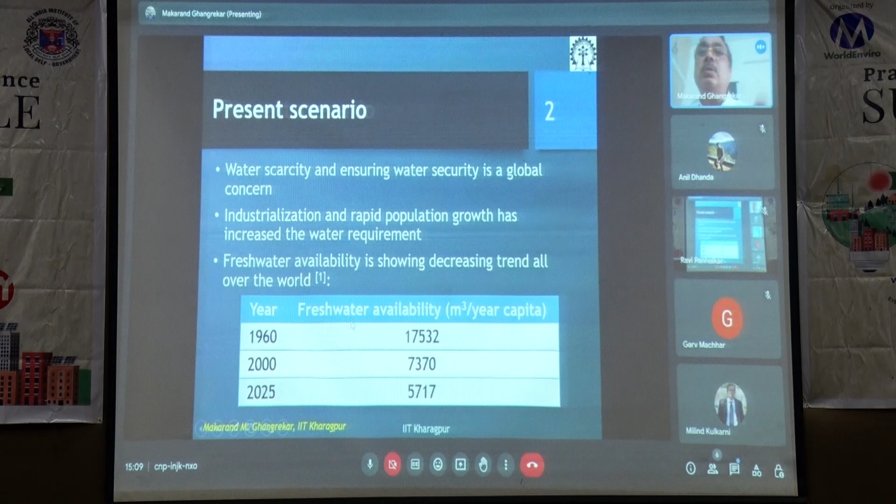In 2025, it is expected to remain around 5,700 meter cube per capita. To fulfill this gap and reduce the stress on fresh water, we need to find alternate sources. Sewage, that is municipal wastewater, can become an assured source irrespective of the season. This quantity of water is generated in every urban area, and if we provide proper treatment, we can produce reusable quality treated water.

In a conventional sewage treatment plant, mostly it comprises primary and secondary treatment, and tertiary treatment is absent. But tertiary treatment is really required to produce reusable quality treated water out of municipal wastewater.

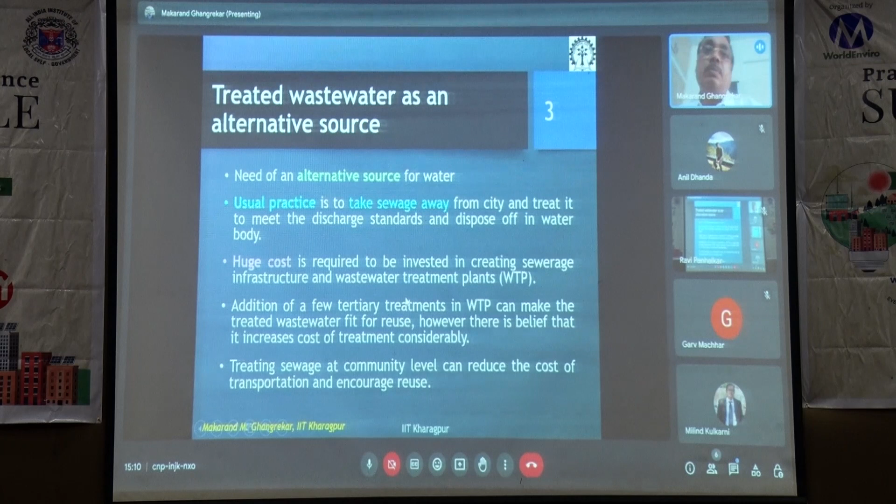The Indian scenario is something like this: about 38% of the sewage generated in this country is being properly treated before disposal, and the remaining is being discharged untreated into water bodies. Though the government is very aggressive in erecting sewerage infrastructure, because of the rapid rate of urbanization, we are still lacking in this infrastructure.

To make treated water out of municipal wastewater available for public use in various non-potable applications, we also need to find technologies which are affordable and can give reliable performance as well as being cost effective.

The concern here is the emergence of emerging contaminants - personal care products, antibiotics, painkillers, and other solvents that we use in day-to-day life. They appear in trace concentrations in sewage and are difficult to remove with primary and secondary treatment. These compounds remain almost untouched, hence proper tertiary treatment is required to produce safe water for downstream reuse.

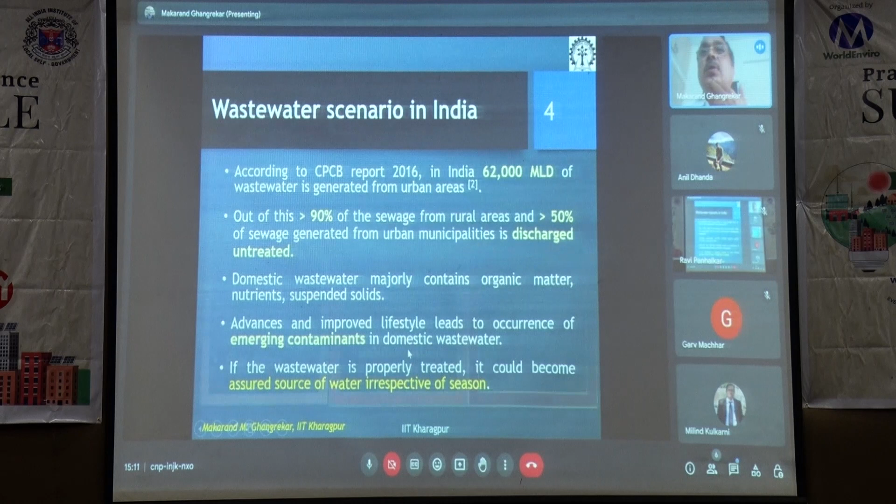We are all aware of primary and secondary treatment, and the need for tertiary treatment. Primary treatment is meant for removal of suspended solids as well as floating matter. Secondary treatment further removes colloidal and soluble organic matter, using either aerobic or anaerobic processes. In this biological treatment process, the sludge generated gets stabilized.

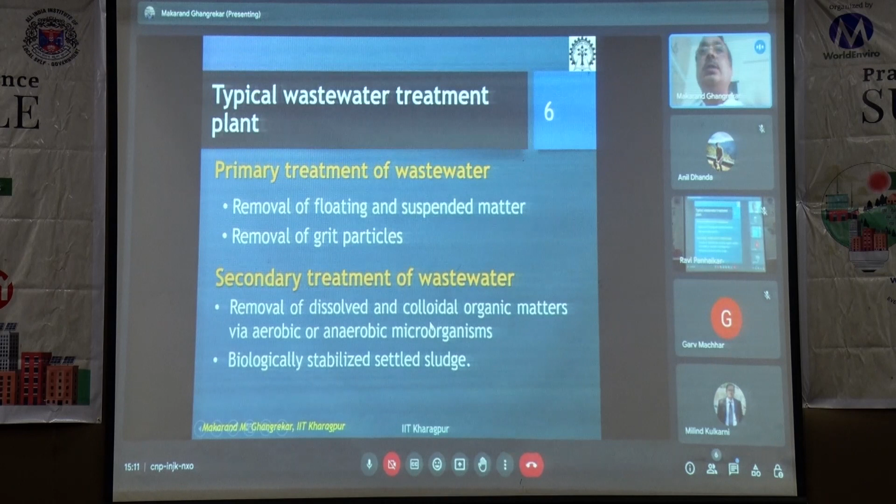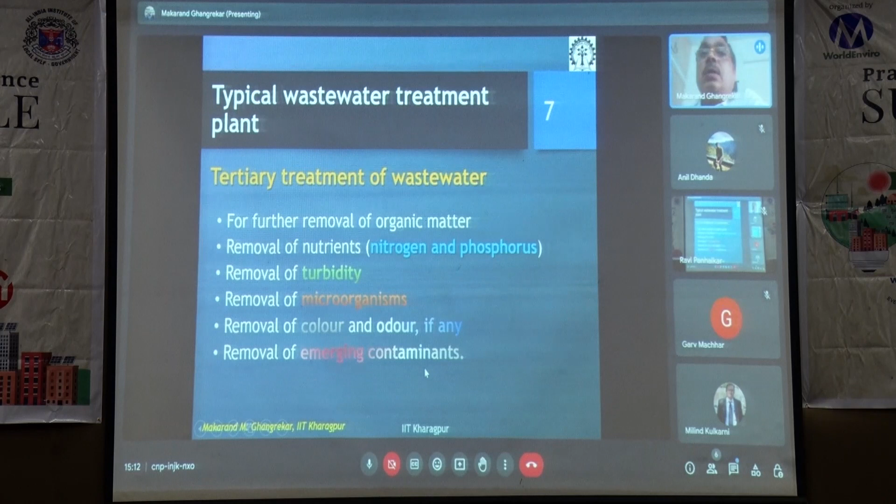However, secondary treated effluent will not have the quality suitable for downstream reuse, hence further treatment may be required for removal of organic matter, nutrients, turbidity, and pathogenic microorganisms typically present in it. Color and odor are mostly due to presence of organic matter, and will get removed once we remove organic matter. We also need to think about removal of emerging contaminants, which is a major challenge, and interested scientists are developing different technologies like advanced oxidation processes for removal of these contaminants.

The National Green Tribunal has given a very ambitious target in 2019: for mega and metro cities, BOD should be restricted to 10, COD to 50, total nitrogen to 10, and total phosphorus to 1. We have adopted these standards by now, and very soon we need to equip our existing wastewater treatment infrastructure to meet these guidelines.

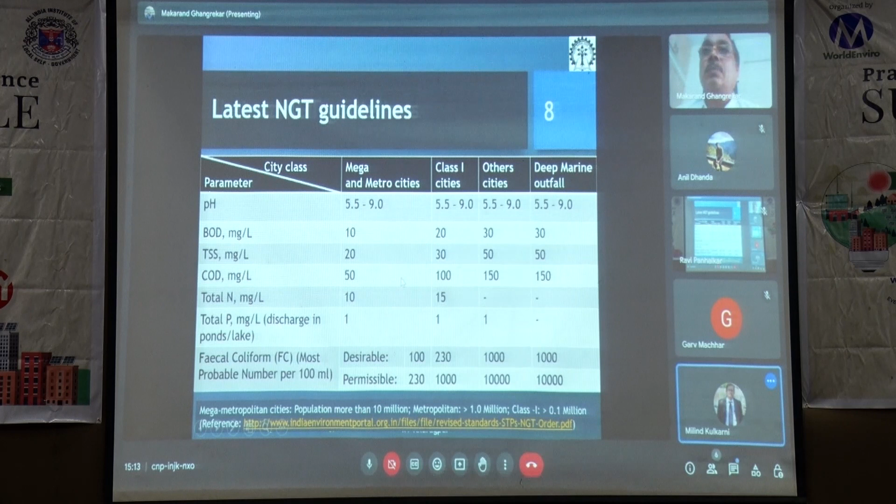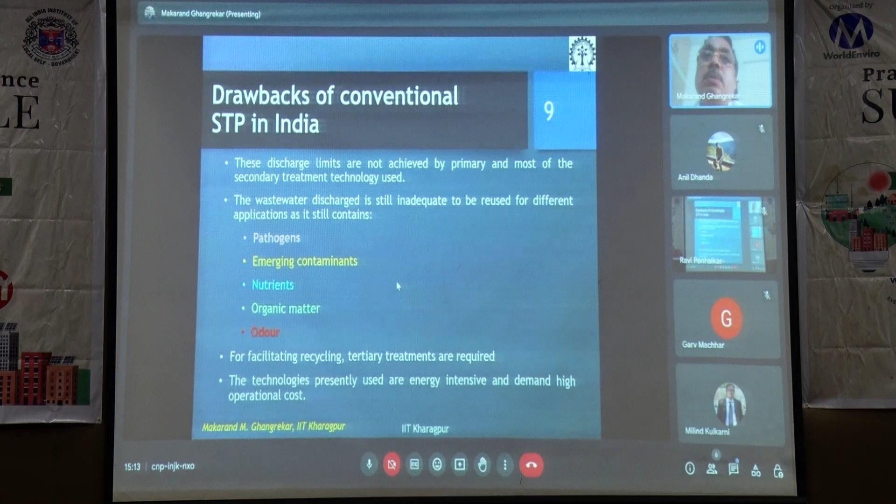The drawbacks of conventional sewage treatment plants include inability to remove organic matter to the least extent, to produce effluent free from organic matter, and we require further treatment for pathogen removal, removal of emerging contaminants, nutrients, etc.

We all know that reverse osmosis, employed in developed nations for treatment of secondary effluent, is capable of producing water free from almost all these pollutants. However, at very high cost. My experience is the cost of employing RO would be of the order of rupees 30 to 50 per kiloliter of water processed, and also in the process, reject is generated. So reject management is also an issue with RO.

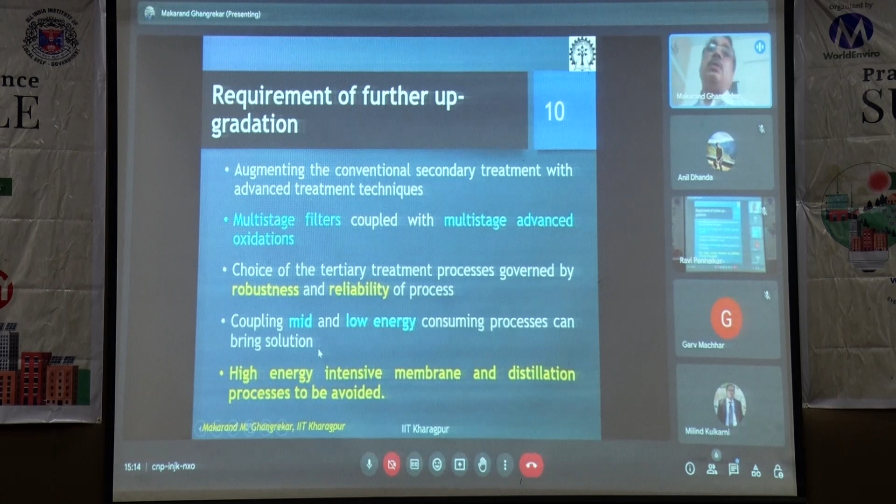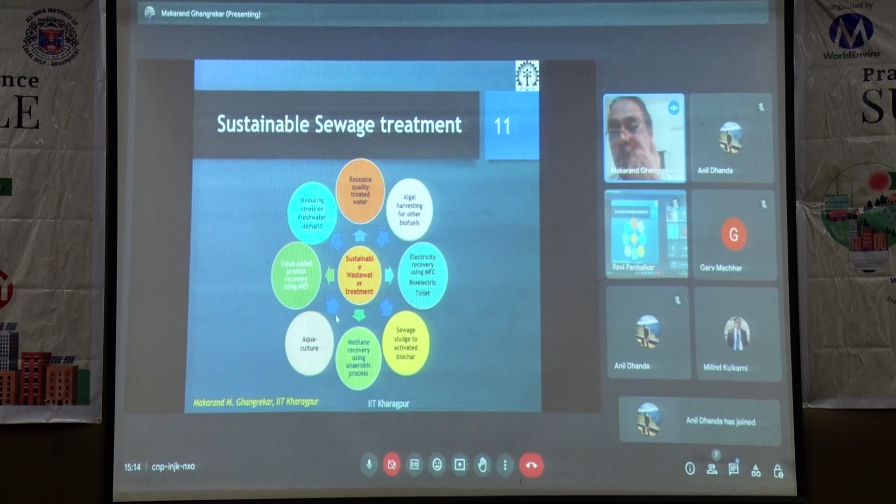Instead, we need to look forward to mid or low energy consuming technologies, at the same time reliable technologies which will produce treated wastewater at an affordable cost. If we invest in tertiary treatment processes which are affordable, that will produce reusable quality treated water at affordable cost. It will reduce the stress on fresh water demand.

To achieve that, we can explore algal technologies so that the harvested algae can be used as a feedstock for biofuels. We can use the concept in bio-electrochemical systems, the specific configuration microbial fuel cell, where the wastewater itself can work as a fuel, and in one step electricity can be recovered.

We can explore the possibility of sewage sludge conversion into activated biochar or hydrochar. This char itself can be used for tertiary treatment or for industrial treatment and many other industrial applications.

Methane recovery from wastewater is almost a mature technology now, and most industries and even municipalities have anaerobic reactors for recovery of methane as a first stage treatment. Aquaculture can also be practiced in partially treated or treated sewage so that it will fetch us additional revenue from the sale of fish.

An upcoming technology: since the last 10 years, scientists are focusing on microbial electrosynthesis, where apart from wastewater treatment, the CO2 released in oxidation of organic matter can be utilized for synthesis of carbon chemicals. By exploring these possibilities, we can impart sustainability to wastewater treatment.

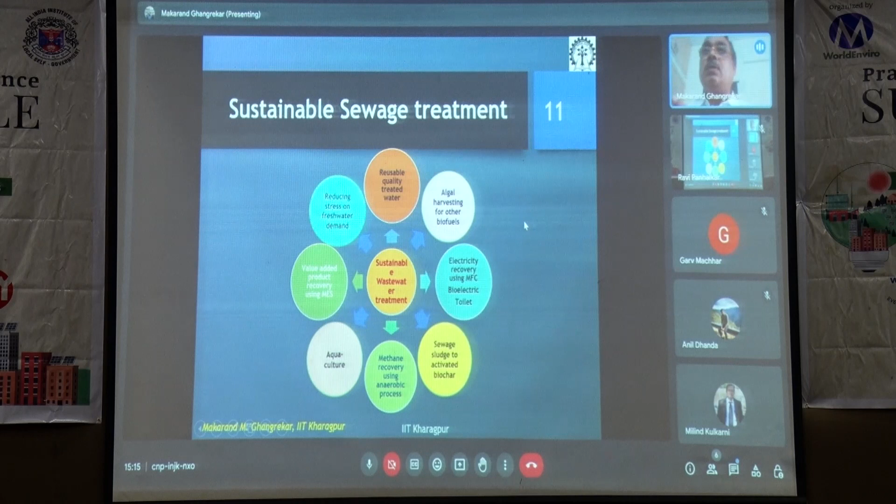From here onward, I will quickly take you through the work we have done at IIT Kharagpur. In 2014, we installed a 400 cubic meter per day capacity UASB reactor.

This UASB reactor is meant for removal of organic matter from the sewage generated on campus. We typically have a very dilute concentration of sewage, with COD annual average around 230 milligrams per liter. While treating such low strength wastewater, biomass granulation has not been reported anywhere other than this plant.

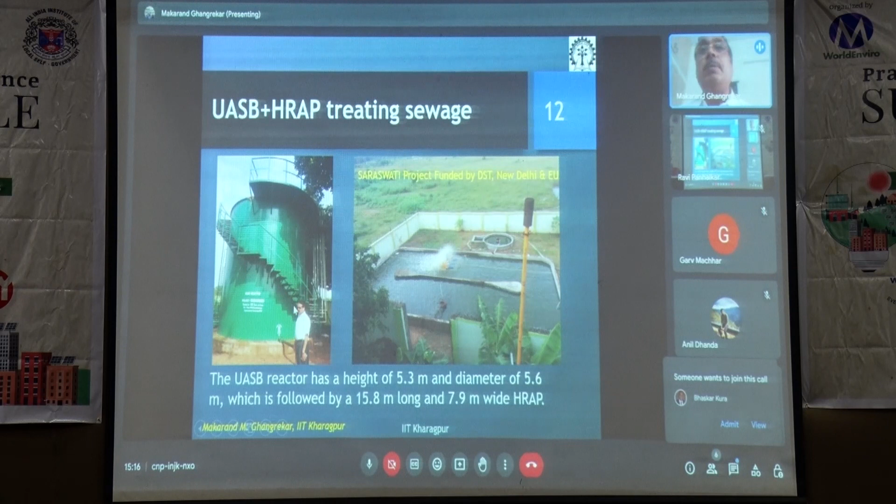We have about two-thirds of the biomass in granular form in the UASB reactor, and the effluent of the UASB reactor gets treated in the high rate algal pond. By properly designing the mixing conditions, the reactor is maintained at the optimum so that it supports biomass granulation, and this way we are getting very high treatment efficiency.

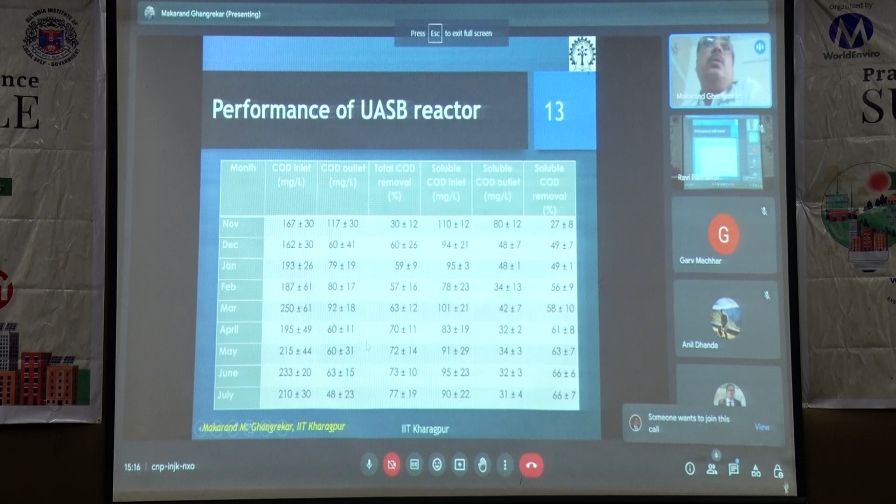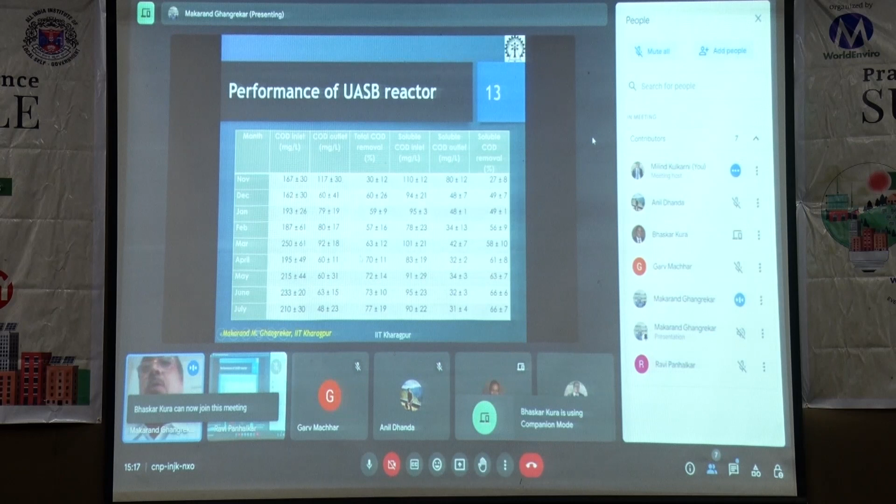Initially it took us 5 months for commissioning the UASB reactor to reach the applicable COD removal efficiency. But since then, in winter this reactor gives around 58 to 60% total COD removal efficiency, and in summer the efficiency goes around 77 to 78%, for total COD removal from the dilute wastewater generated on campus.

The high-rate algal pond contributes further for nitrogen and phosphorus removal, with more than 85% nitrogen as well as nearly 90% phosphorus removal. On top of it, it helps in algal cultivation, raises the pH to 9, and that helps in reducing 2 to 3 log scale pathogens.

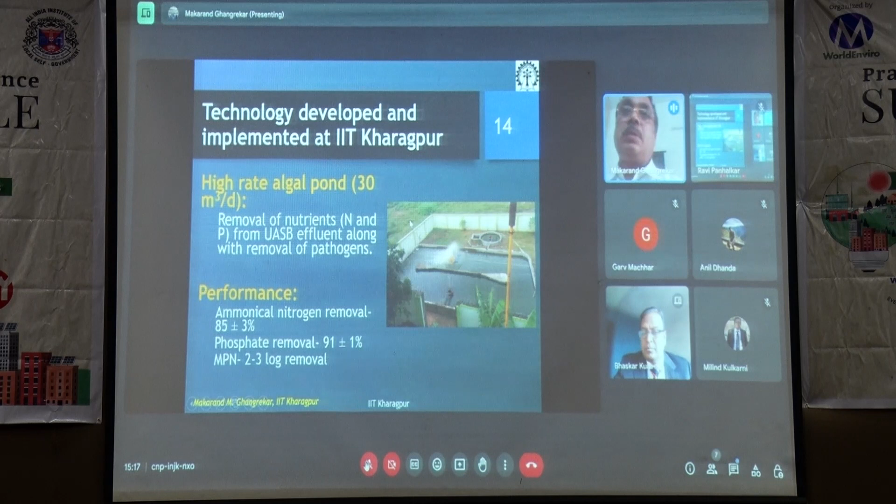So this way, back in 2014-15, the effluent generated was meeting the regional norms for less than 1000 MPN per 100 ml, and we were using this treated water for horticulture purposes. However, with the stringent norms coming up in 2020, we developed another 300 cubic meter modular sewage treatment plant comprising anoxic MBBR followed by aerobic MBBR.

This nitrified effluent of aerobic MBBR is recycled back to anoxic MBBR, and then it goes to the lamella clarifier, then dual media filter, and we have three-stage disinfection: ozonation, chlorination, and UV. So three-stage disinfection comes with advanced oxidation process to address emerging contaminants. That was our target, and then finally ACF to trap any disinfection byproduct to produce effluent safe for reuse.

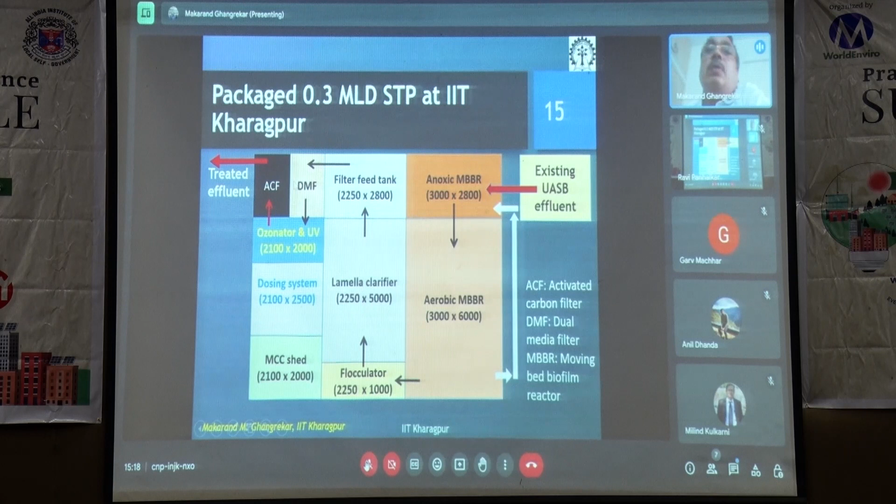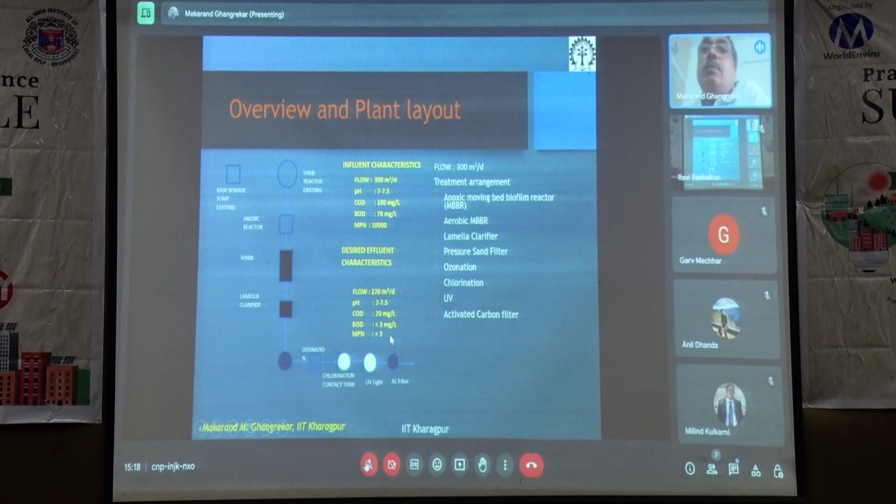These are photographs of the plant, and a very ambitious target that we set: COD 20 milligram per liter, BOD less than 3 milligram per liter, and MPN less than 3, so that the water is suitable for any non-potable reuse purpose on campus.

And this is the performance. Soluble COD yearly average is around 18. Soluble BOD, sometimes we get BOD, but most of the time it is 0, so 0 to 1 - less than 3 we are easily achieving. Coliforms also majorly remain nil, but sometimes accidentally we may get one or two. So overall, this treated water is meeting the expectation.

But the problem is the presence of TOC. When we give ozone dose of more than 5 milligram per liter, we can bring it down to below 10, but that makes it a costly affair. So with the regular dose of 2 to 3 milligram per liter of ozone, the TOC gets elevated to 15 milligram per liter. This TOC comprises nearly 800 compounds, including antibiotics, personal care products like shampoos, and various other chemicals we use in day-to-day life. Their presence, though in traces - microgram and nanogram per liter concentration - is the only thing preventing us from calling it potable.

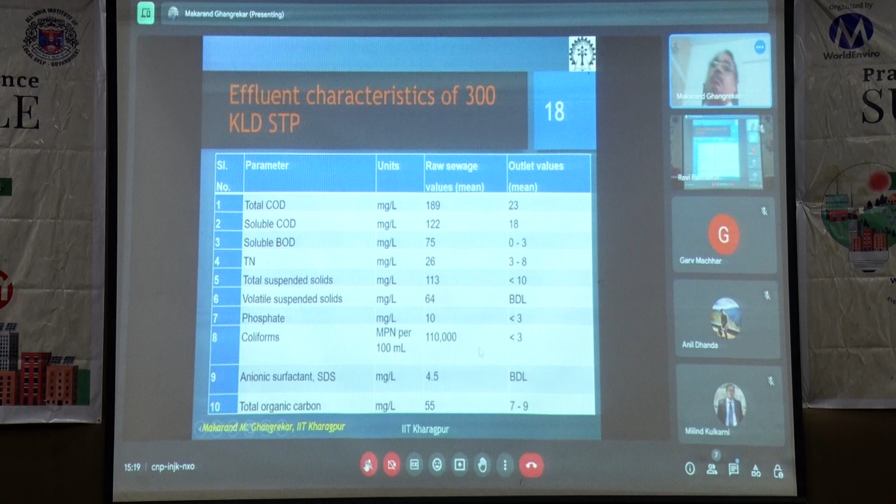Otherwise it's potable quality water. This coliform, by maintaining it in proper order, is really meeting close to the potable quality requirement. Having experienced this in the 300 cubic meter plant,

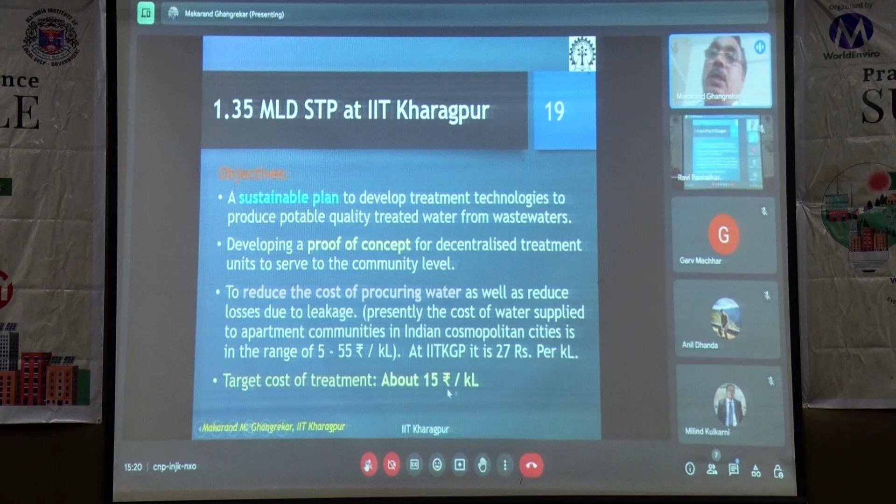the same concept we extended to develop a 1.35 MLD sewage treatment plant to treat the wastewater generated from the hostel, near the hostel itself, so that the treated water can be used back in the hostel premises for horticulture, and also for recharging the pond present on campus. We set a target of keeping the life cycle cost less than 15 rupees per kiloliter.

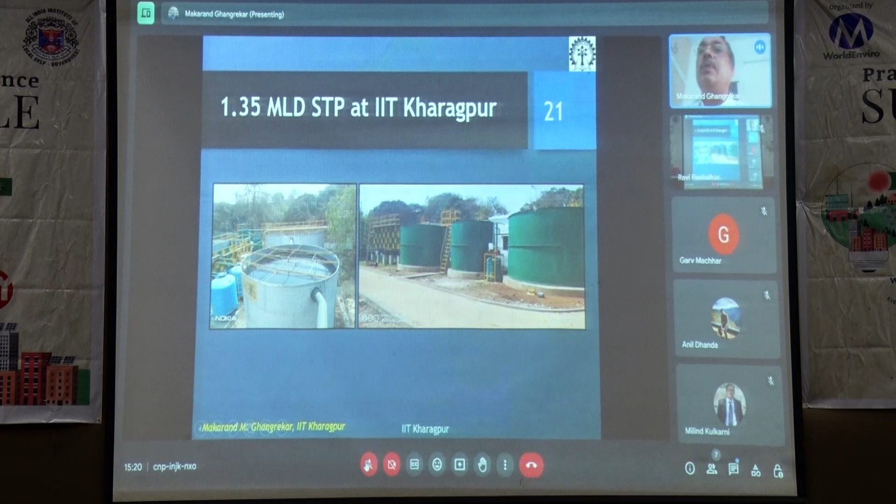The similar treatment chain we used comprising anoxic MBBR, aerobic MBBR, lamella clarifier, and here we eliminated UV and only installed ozonation followed by chlorination. So there is the ozonation tank, then chlorination tank, and this treated water reservoir from where the water is being pumped back to the respective hostels for horticulture.

And this is the performance which will convince you of this plant. Soluble COD is typically less than 20 milligram per liter, total COD remains less than 30 milligram per liter. MPN also sometimes we get accidentally, 3 to 5 number, but it's reasonably under control. NGT says 100 fecal coliforms; we are having total coliforms of 3 to 5.

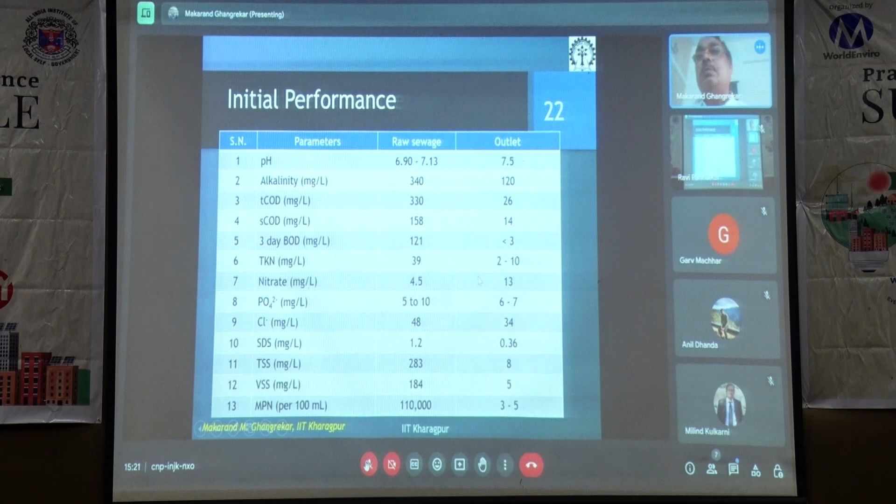So the water quality is much superior than even the raw water available in the river, which we are accepting for fulfilling our potable needs. So this quality is superior than the natural water quality available in the river.

Then while evaluating the life cycle costing, we evaluated cost for primary and secondary treatment alone as case 1, case 2 with primary secondary treatment followed by ozonation, case 3 ozonation plus chlorination, case 4 with ozonation and then UV, and case 5 with all three disinfection processes in place.

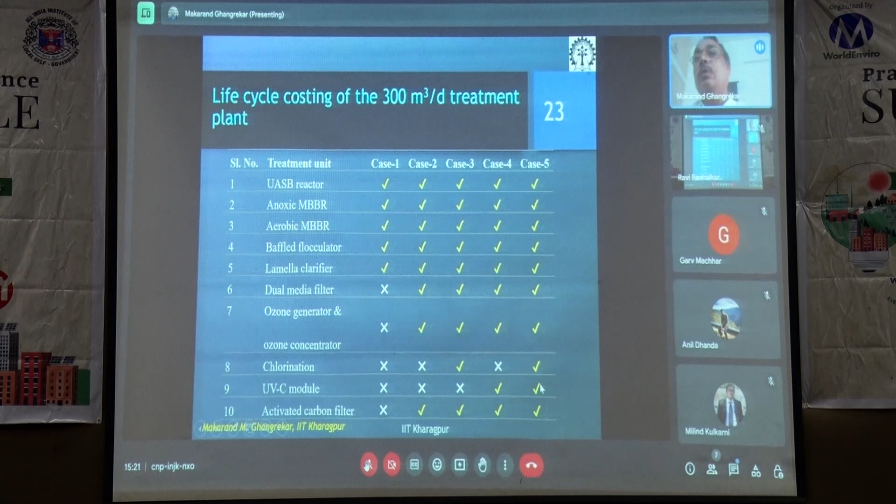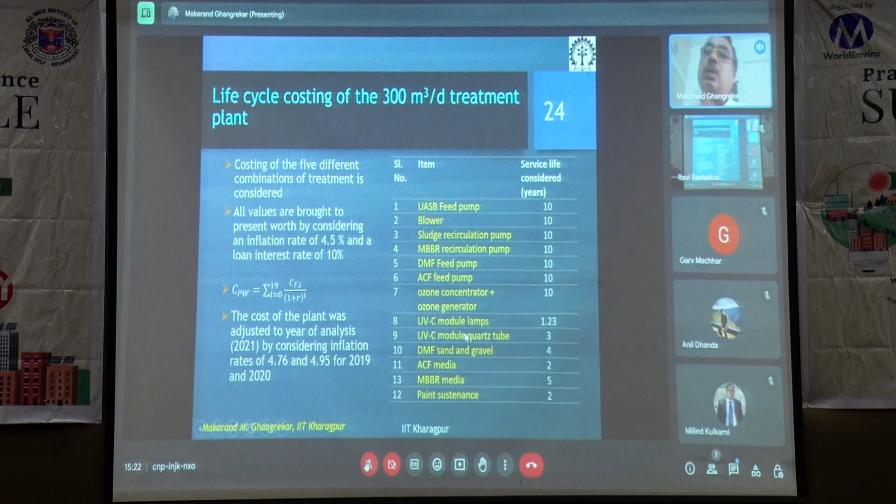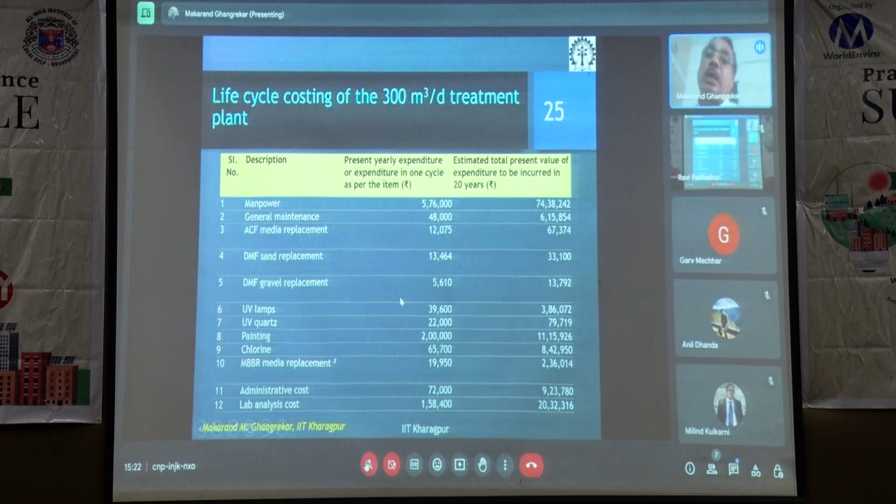What will be the cost of treatment, considering all realistic costs of manpower, salaries, electricity, based on the installed capacity, periodic replacement of pumps, UV lamps, UV sleeves, media of MBBR - all that possible expenditure, even painting the plant and minor maintenance, contractor profits, third party analysis, certifications - all those possible costs were taken into account, and the present worth is evaluated, and based on that present worth, the cost of treatment per unit of water is estimated.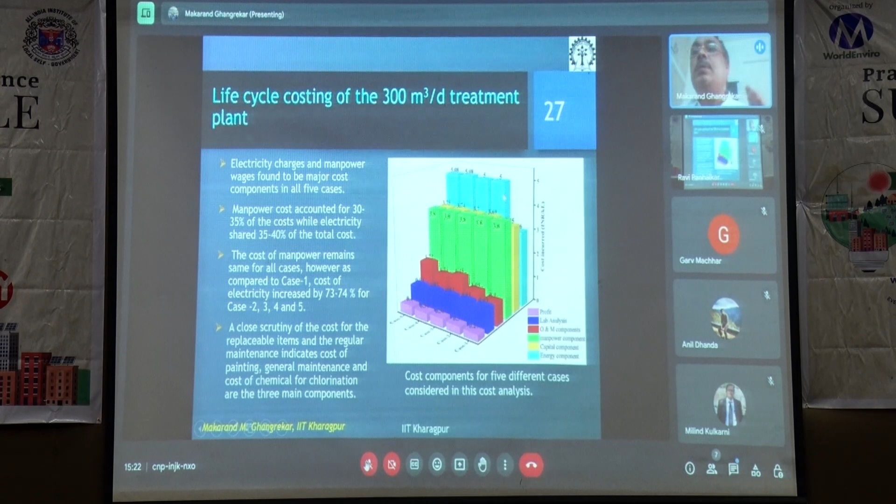You can see, if we have only primary and secondary treatment in place, the major component is manpower salary, second major is capital cost, and third major is energy need. Whereas when we have tertiary treatment in place with all three disinfection stages, the cost is marginally escalated by a few paisa, whereas for only ozonation and ozone plus chlorination, the cost almost remains similar.

Considering all this cost, for a 300 cubic meter per day capacity plant, the cost per unit of treatment is coming to less than 16 rupees per kiloliter. Because of the larger size, when the plant is 1350 meter cube per day, the cost is coming to less than 11 rupees per kiloliter. Our set target was 15 rupees, and we are able to produce treated water at nearly less than 11 rupees per kiloliter. On our campus, the water supply costs us about 27 rupees per kiloliter. So there is a net saving of nearly 16 rupees per kiloliter of water that we save and use for non-potable purpose. That gives us the revenue return model for this sewage treatment plant.

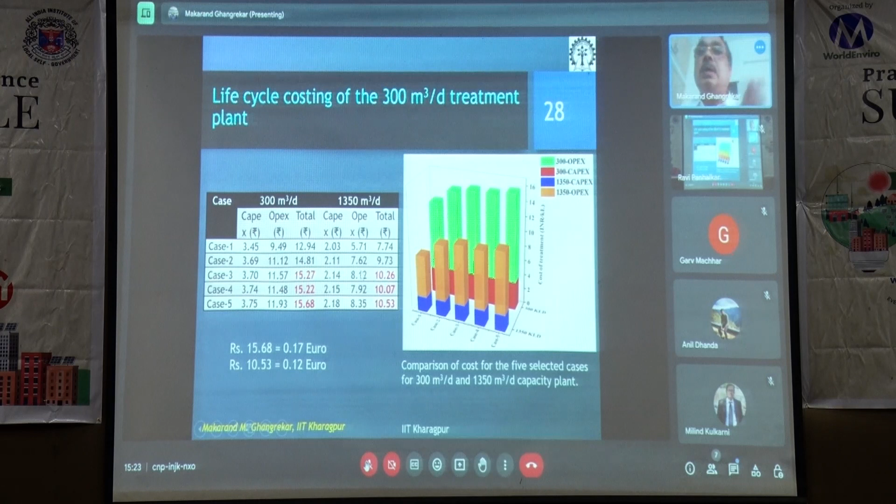Now, the upcoming technologies which our lab is researching in the bio-electrochemical system - I will take you through a few more slides.

Few of you may be aware of what it is. The concept has come up - the first paper on microbial fuel cell came in 1911, second sometime in 1936, third in 1960, and fourth in 1998-1999. So in a century's time, only three or four articles were published. But since 1999 onward, there is a surge in knowledge contribution, and you will get convinced when I show you the publication record on this.

MFC consists of an anodic chamber, where the wastewater works as fuel. When the wastewater is applied, it comes in contact with electrogenic microbes grown on the anode. These microbes oxidize organic molecules, converting them into electrons and protons. The electrons pass through the external circuit towards the cathode, while protons pass through the proton exchange membrane, which separates anode and cathode. The cathodic chamber is generally aerated, so the oxygen present in the air reacts with electrons and protons to get converted into H2O. This way, the electron flow generates electricity flow in the opposite direction, and the external device that we would like to power can be powered using this MFC concept.

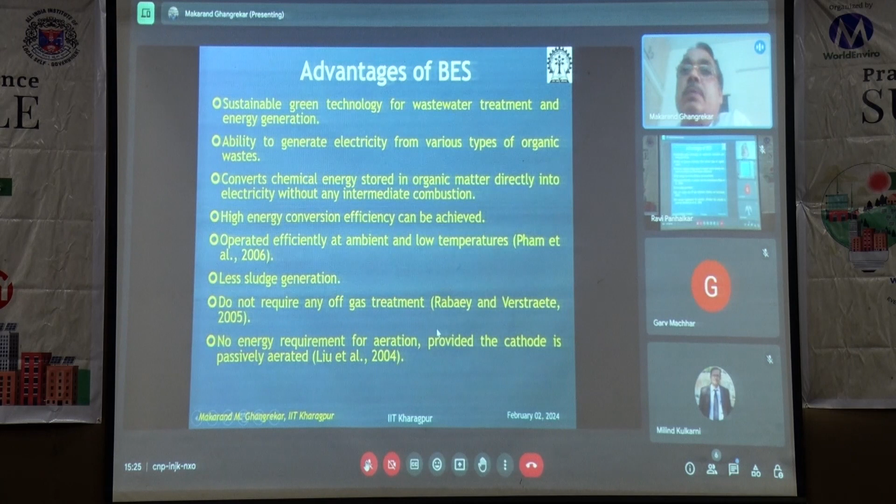This microbial fuel cell has distinct advantages. It can produce a sustainable green technology while treating wastewater and generating electricity, which is stored in the chemical bonds of organic matter. High energy conversion efficiency is expected. It can be operated at ambient as well as low temperatures. There is less sludge production, equivalent to that of the anaerobic process. It does not require any off-gas treatment, because the off-gas in the anodic chamber is carbon dioxide. There's no energy requirement for aeration, provided the cathode is passively aerated. I will show you the pilot where the cathodes are air cathodes.

Though the technology looks exciting, there are challenges. An individual MFC, a single cell, can theoretically give up to 1.1 volt, but in practice it ends up giving only 0.5 volt, because of unavoidable losses - activation loss, concentration polarization loss, and ohmic loss. When any charge flows, there will be some resistance, and that loss will occur. So in practice, we end up getting about 0.5 to 0.6 volt. Hence, scientists are trying to research the materials involved in fabrication of this device, so that efficient materials can keep these losses as minimum as possible.

Scaling up of the system is difficult due to involvement of bio-electrochemistry, which restricts it. It cannot be like the UASB reactor of 150 cubic meter volume I showed you. Even if we have an MFC of 150 cubic meter volume, it will generate only 0.5 to 0.6 volt, and that voltage is useless for any practical application. So we need to have MFCs in stacks so that we are able to integrate voltage as well as current.

The electrodes presently used involve platinum as a catalyst to accelerate the oxygen reduction reaction, and that makes the fabrication way costly. The membrane separators, the PEM I talked about - the Nafion commercially available membrane - cost about 1,600 US dollars per meter square, which makes fabrication very costly. Even the second runner, Ultrex membrane, is also about 800 to 900 US dollars per meter square when we import it in India.

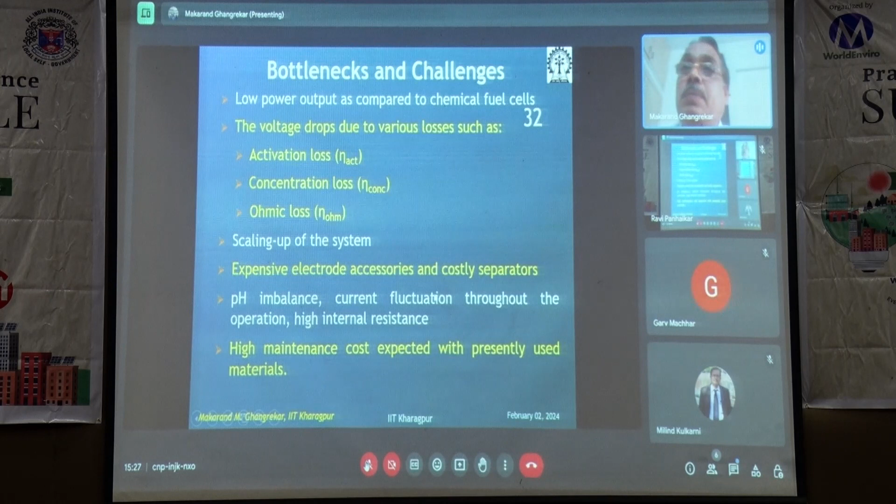That makes fabrication cost 10 times more than the existing technology. And periodic replacement of these components will also add to the cost of this device.

This MFC, or bio-electrochemical system, has several applications in the life sciences. Apart from wastewater treatment, it can be used as an energy source for powering low power electronic devices, telemetry devices, or even domestic micro power needs like mobile charging devices. Mobile phones can be charged on this electricity generated. It can be configured for desalination. It can also be used for powering medical implant devices in the human body.

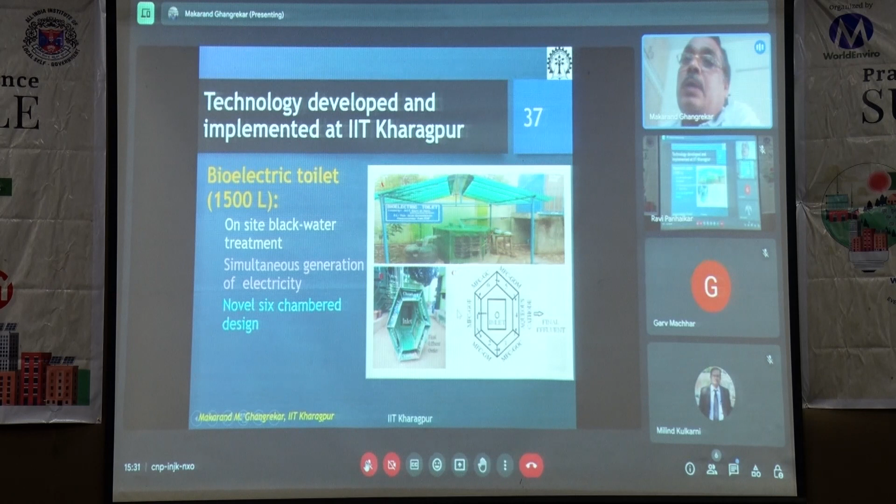We use different catalysts for academic investigation to find out performance. Here is the performance of operation for more than two years. BOD is nearly 23, less than 30, meeting the standards then in place. COD is less than 80, and MPN is also less than 100, making this water suitable to be reused back in the toilet for flushing.

So what we do in a day: once treated, the water from the treated water sump is pumped to the elevated service reservoir above the toilet. This way, once you flush the toilet, an equal amount of treated water is displaced from the system and gets stored in the treated water sump.

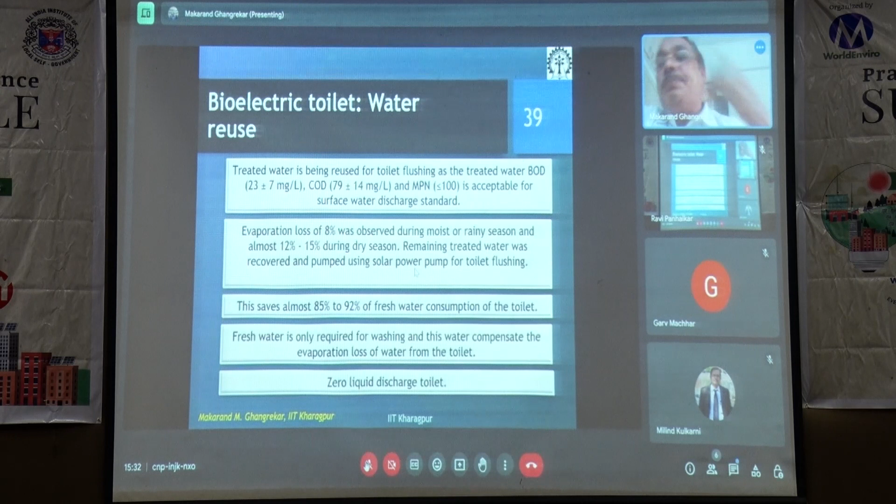The evaporation loss that is bound to occur in Kharagpur, we experience in the range of 8 to 15% across different seasons. This can get compensated with the water used for cleaning, since every use of the toilet uses half a liter to one liter of water. This compensates the evaporation loss, making this bioelectric toilet effectively water-free, because water will be continuously available for flushing and for maintaining cleanliness.

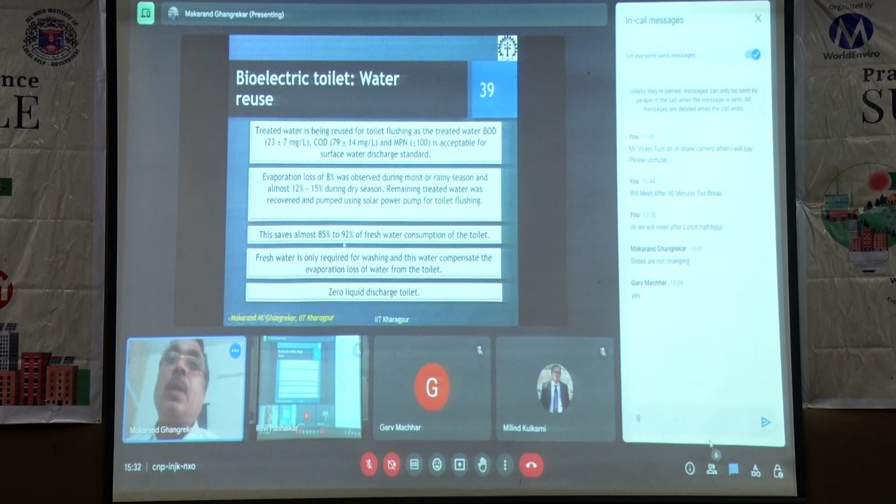Apart from that, the electricity generated in the process will be used for illuminating the toilet premises and the toilet cabin at night.

So this way, fearless use of the toilet by ladies and children can also be supported at night, because they are typically afraid of attack by insects or animals during night time.

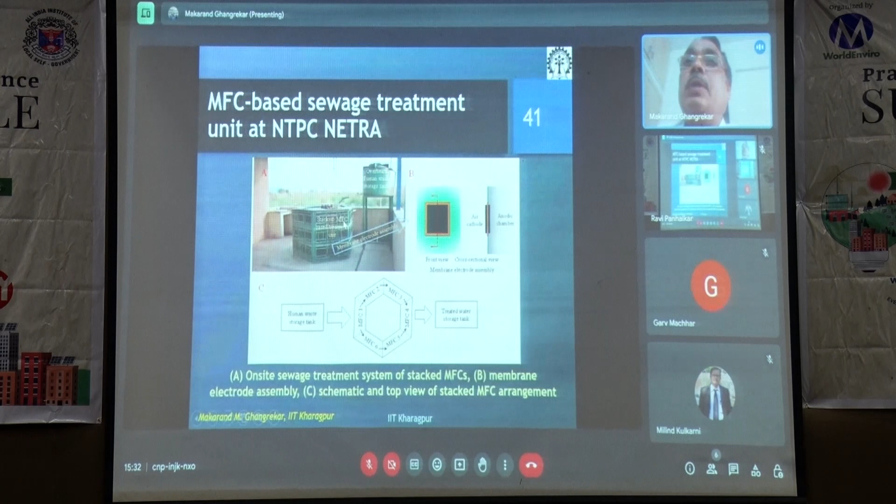We have another installation at the NTPC campus, Greater Noida, which we operated for more than 1.5 years for treatment of sewage generated from their guest house, and this also gave satisfactory performance.

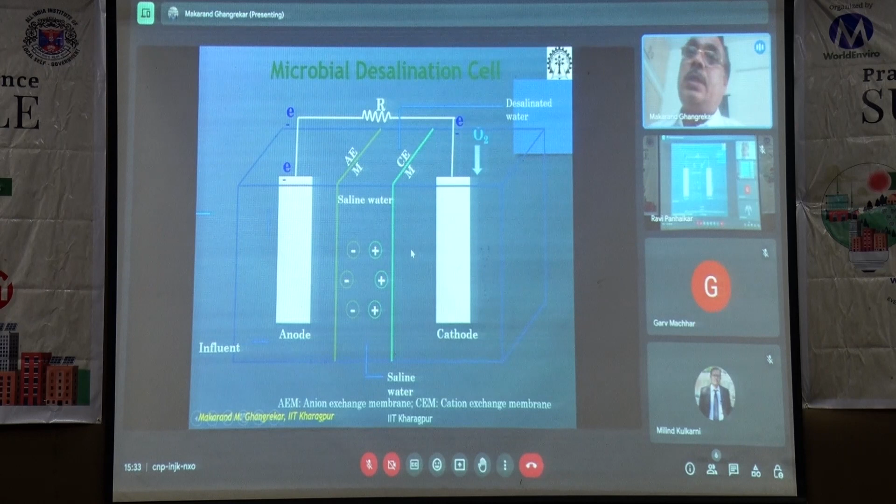We can configure a microbial fuel cell into a microbial desalination cell by placing a desalination chamber between the anodic and cathodic chamber. Wastewater can be treated first in the anodic chamber for removal of organic matter, and the same wastewater can be applied in the desalination chamber to facilitate desalination.

Because of the charge difference between anode and cathode, the anions migrate towards the anode and cations migrate towards the cathode, and this way desalinating either wastewater or saline water is possible.

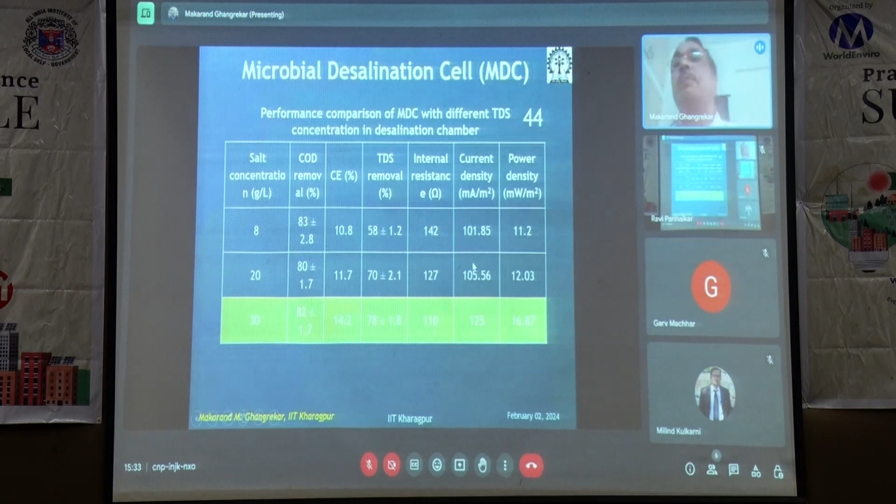We did experiments with Tata Steel wastewater under their own funding project, using different salt concentrations in the desalination chamber. The TDS removal ranges between 60% to 80%, and the COD removal is all along above 80%. Apart from organic matter removal and supporting desalination, it also helps in harvesting electricity, so multiple advantages this MDC configuration can offer.

The last configuration I was talking about is microbial electrosynthesis. The carbon dioxide generated during oxidation of organic molecules can itself be captured again to convert it into value-added chemicals, or we can use carbon dioxide from flue gas also for synthesis of the chemicals.

The concept here is that instead of harvesting electricity, we impose a potential of -0.7 to 1 volt on the cathode. That will drive these CO2 reduction reactions forward using specialized culture, and we can convert this into various carbon compounds - 2, 3, 4 carbon compounds.

In the anodic chamber, either wastewater can be treated or we can simply use water. Because of the imposed potential, some water splitting will occur, making protons available for the cathodic reaction. Scientists have reported formate, acetate, and ethanol at various concentrations, and in our lab we could successfully synthesize acetate, isobutyrate, and propionate.

Then we came up with a 12.6 liter capacity MES. The idea here was that biogas generated from the UASB reactor would be passed through this MES system, so that the CO2, typically about 30% in our biogas, can be captured and converted into chemicals, and this way it will also enrich the methane content in the biogas.

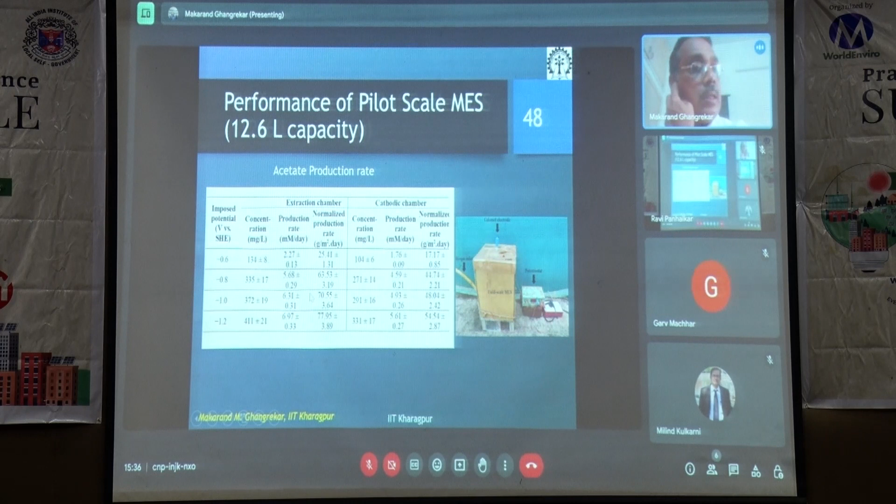With recent research efforts, the acetate yield we have reached is up to 1.5 grams per liter. But still, for practical application, we need to enhance the acetate yield further by selecting a proper catalyst and by enriching the proper microbial culture.

With this, I will stop and look forward to public outreach, dissemination, replication of these technologies, and training manpower further.